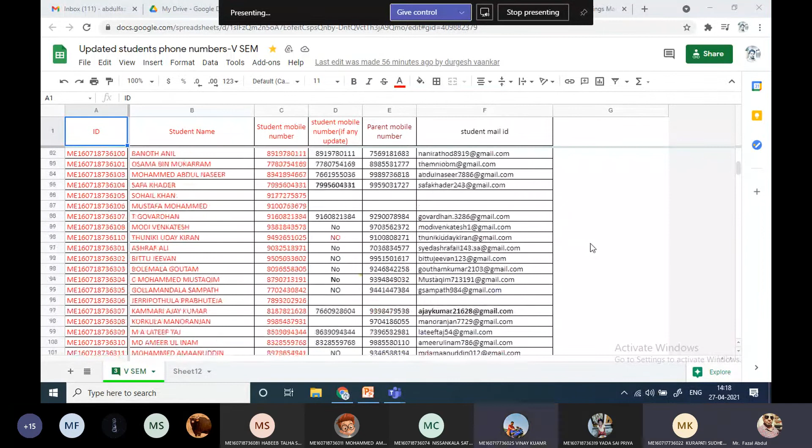Today we are going to discuss the topic of leaf spring design. Before starting, I want to show a video related to the leaf spring, how it is manufactured.

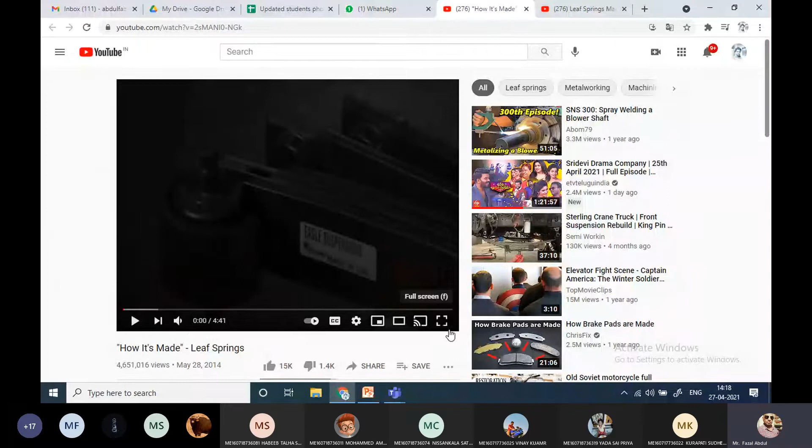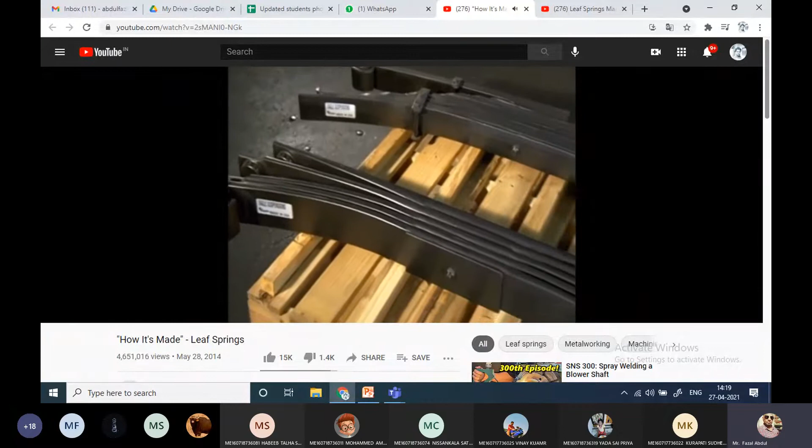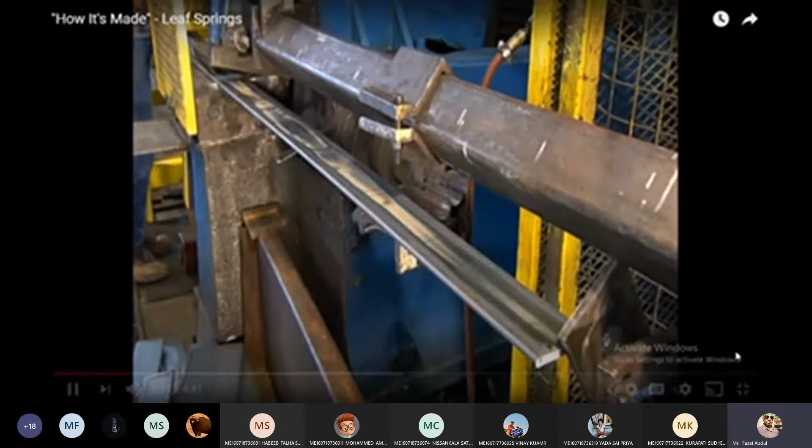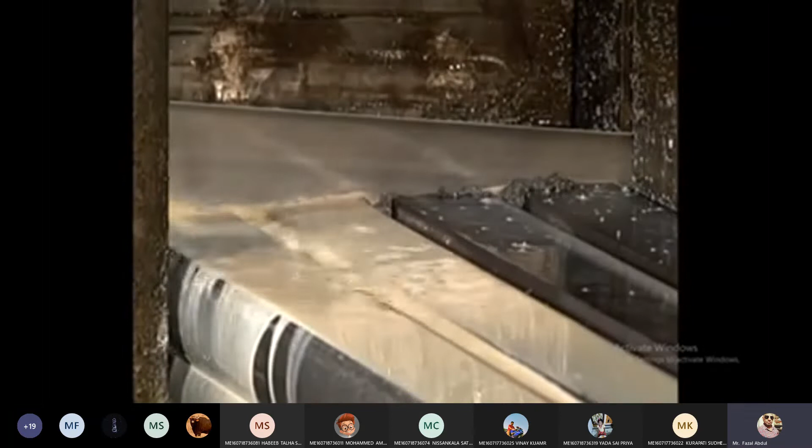A leaf spring is a stack of curved plates or leaves, sometimes just one. This spring has the flex to absorb bumps and dips in the road, but it's strong enough to provide serious support. Today, these suspension springs are generally used for trucks and heavy vehicles more than cars. Production starts with spring steel, an alloy that has elasticity. Big shears cut the steel to various lengths for a multi-leaf spring, one of two kinds of leaf springs. Using a bandsaw, they cut steel for the other kind, known as a full taper spring, made of 1 to 4 leaves of approximately the same length but various thicknesses.

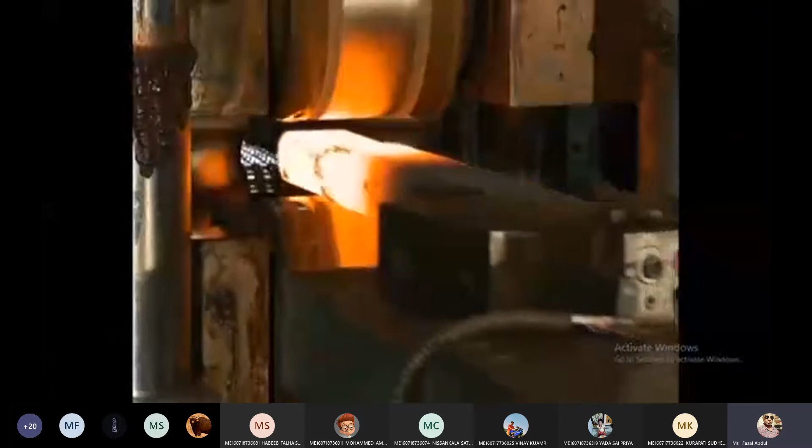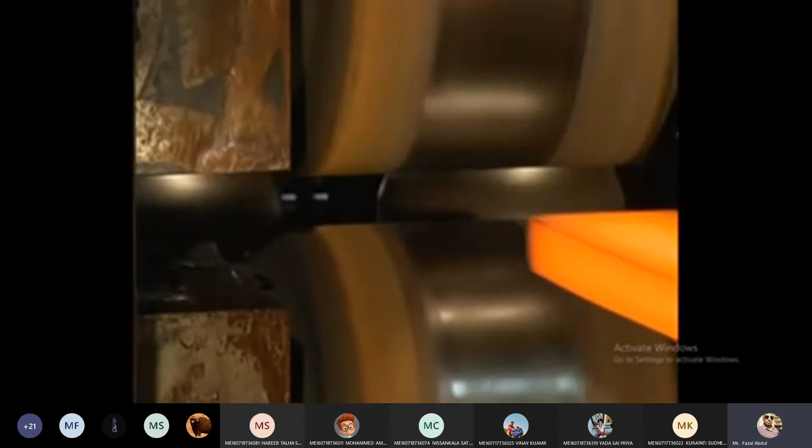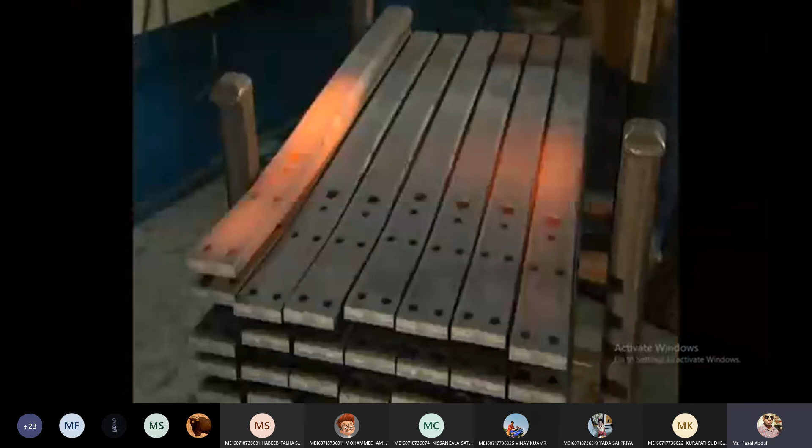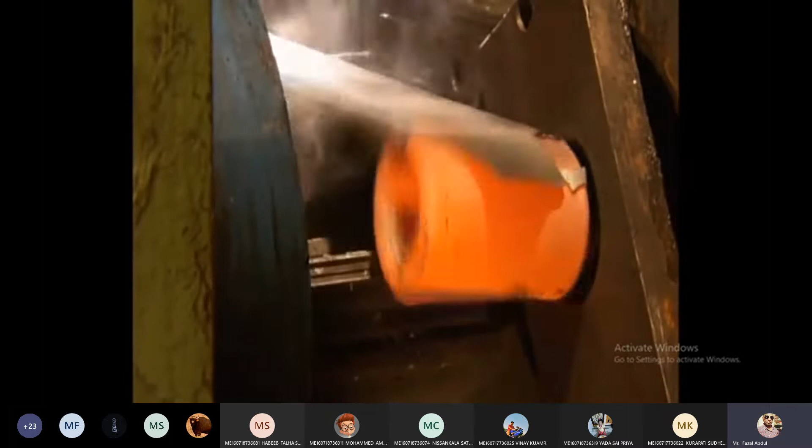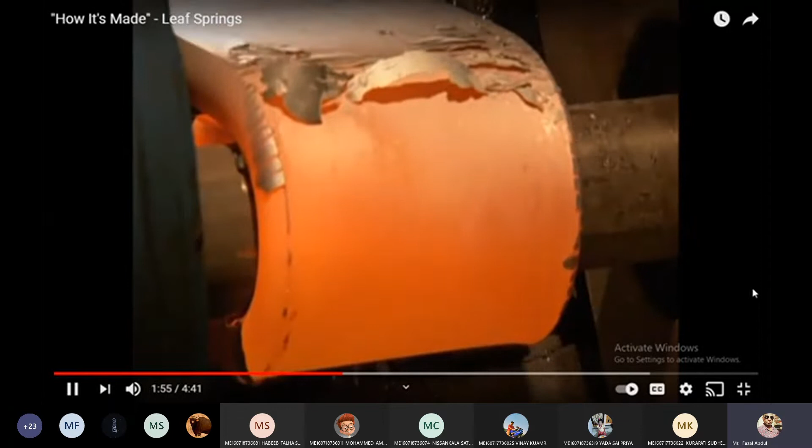Meanwhile, other members of the team work on the multi-leaf spring. They feed the heated tip of the main leaf to a machine that wraps it around a die form, creating an eye mount for attaching the spring to the vehicle. They create an eye mount on the other end as well. Next, they curl the ends of a slightly longer steel bar into a loose C shape, which will serve as an outer protective wrap for the main leaf and protect the eye mounts.

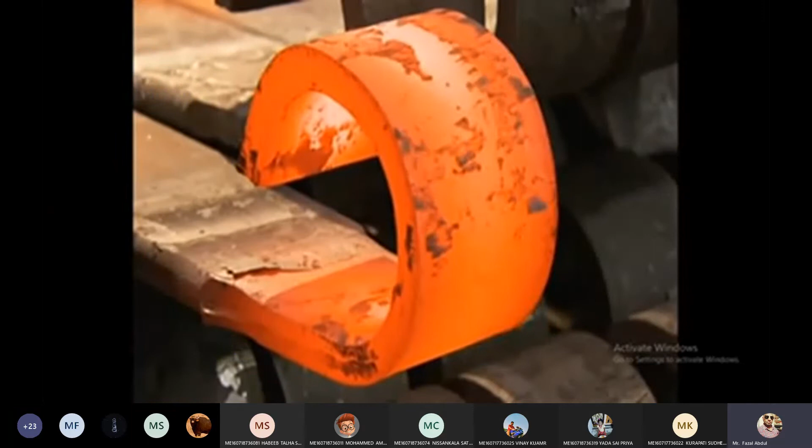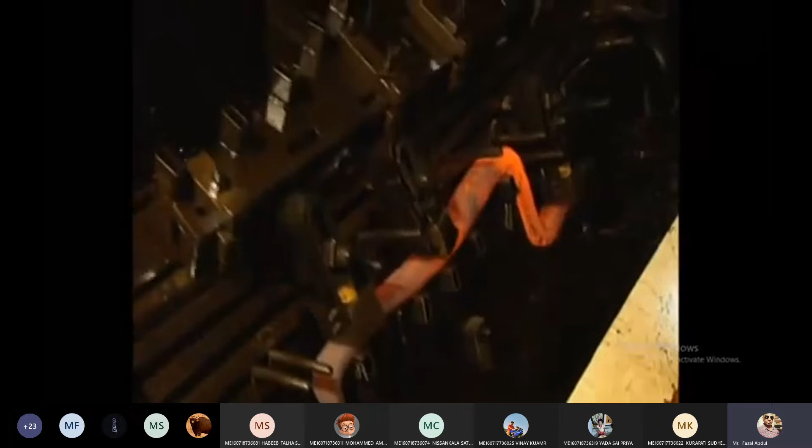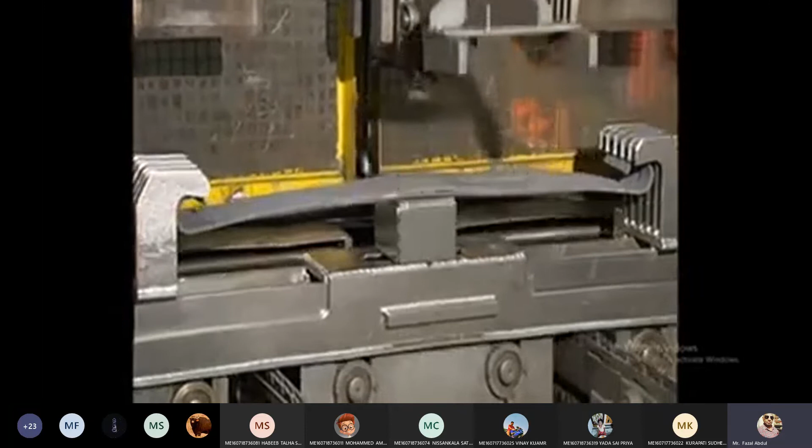Back to the taper spring now. Hydraulic machinery bends it to the final Z shape so it fits around a vehicle axle. They quench both the taper and multi-leaf springs in oil and then temper them in a furnace to strengthen the steel. Then it's time for a process known as peening. Machinery clamps the steel onto a carriage, which takes it through a chamber for blasting, which changes the surface tension, further strengthening the metal.

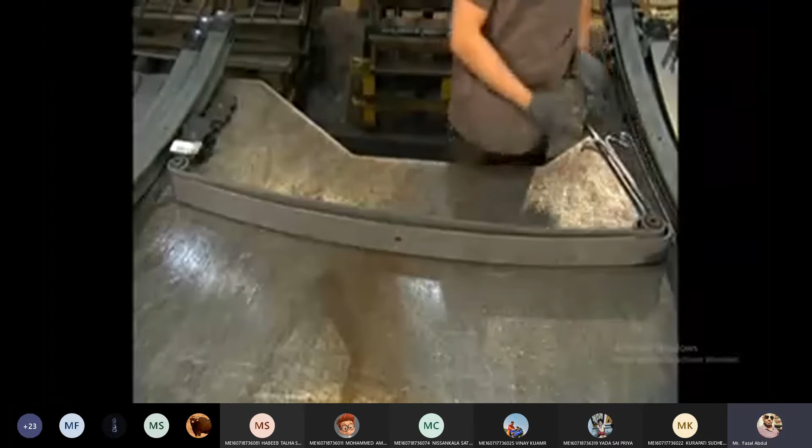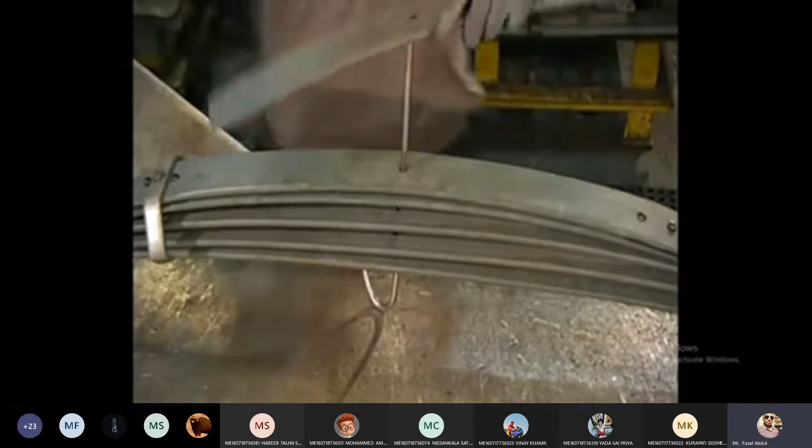A worker now assembles the multi-leaf spring. He inserts a pin through the main leaf and the wrap to align them. Each of the next leaves is shorter than the last; they're known as graduated leaves. This design makes the spring more flexible.

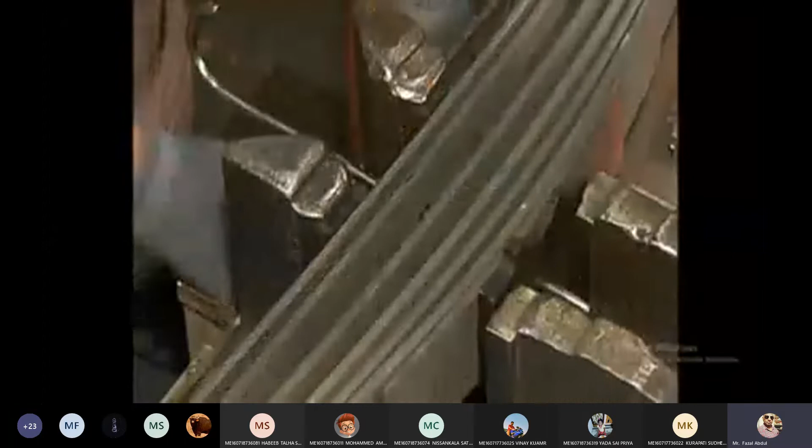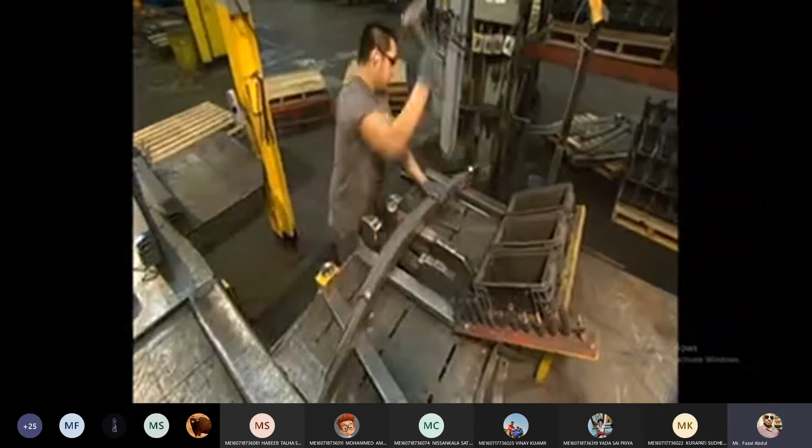He transfers the stack to a hydraulic station and inserts a different pin for more precise alignment. He activates the hydraulic mechanism and it squeezes the leaves together. The mechanism maintains the leaves under tension as he removes the pin and now bolts them together. He pounds clips installed at specific locations on the spring to close them around the leaves. The clips tighten the stack all the way across and stop the leaves from twisting or turning.

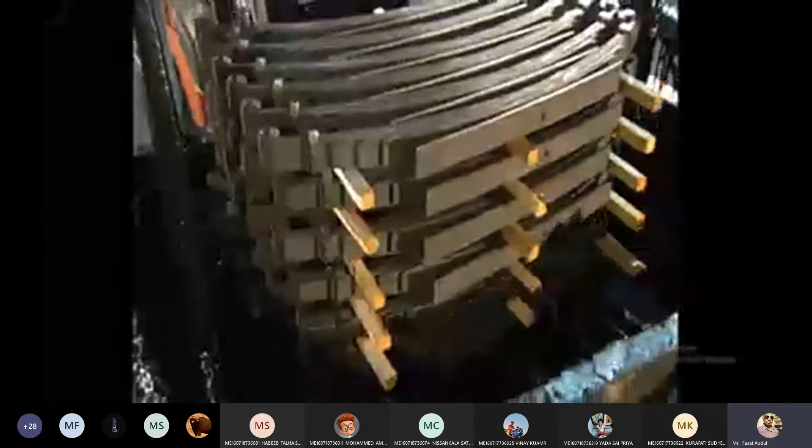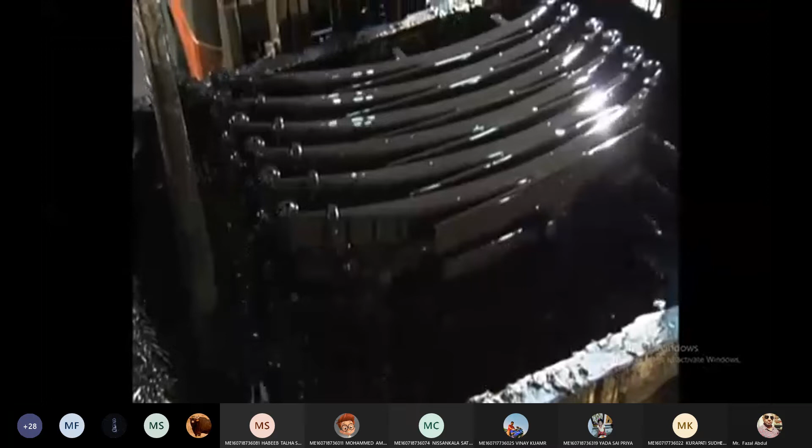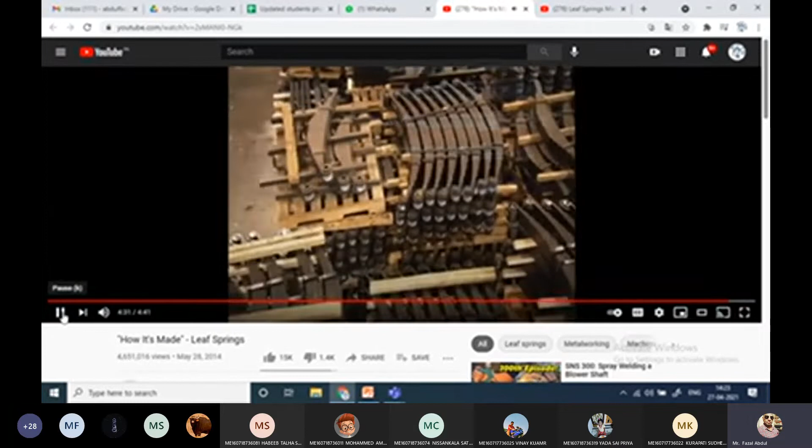Next, another hydraulic device applies pressure to simulate the load the spring will carry. This sets the spring to a specific height and compresses it to stiffen overall performance. The worker measures the spring to confirm it meets specifications. The assembled leaf springs take a quick dip in a tank of black paint, coating the leaves, clips, and fasteners. Painted black, they blend in with other components on the vehicle undercarriage. Now complete, these leaf springs can be depended on for support when the going gets rough.

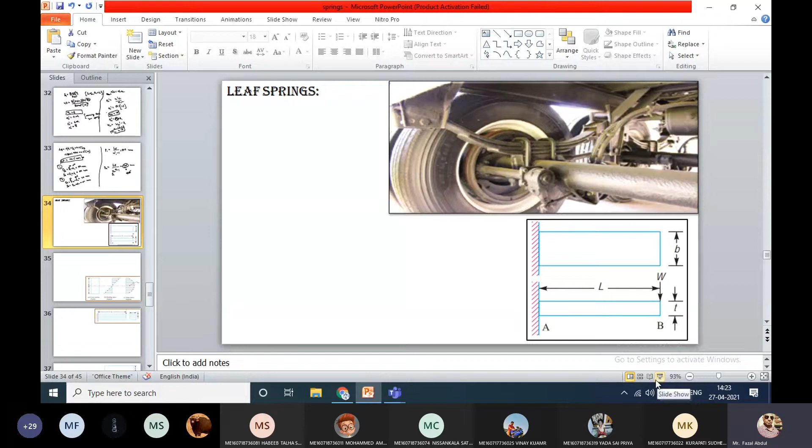So I think you got clarity about how the leaf spring is manufactured. Now coming to the leaf spring design, I'm going to explain how it is designed, on what basis, and what considerations are involved. This I am going to explain today.

We just saw the video of how the leaf spring is manufactured. The structure of the leaf spring is a semi-elliptical shape. To manufacture it, the shape is formed by a number of plates arranged together. Each plate has some width, thickness, and cross-sectional area. All plates are arranged together, and the first portion of the spring is known as the main spring.

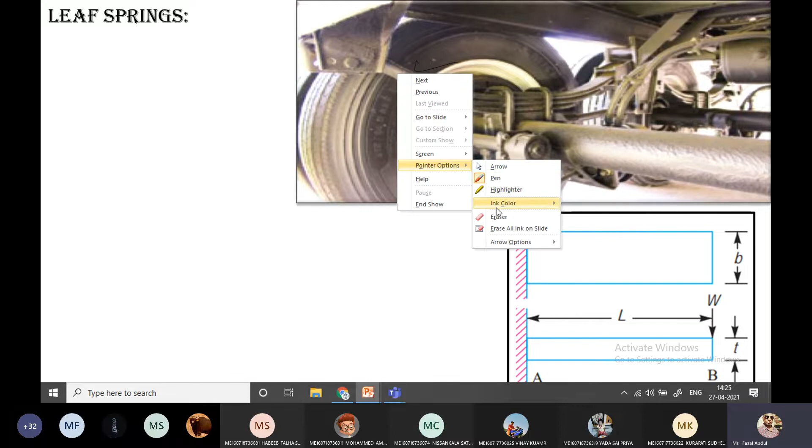In this diagram, the first portion of the spring is known as main spring. The bottom portion of the springs are called graduated or supported leaf. Why do we call it leaf? Because the plates are known as leaves. All the leaves are gathered, and with the main bolt, here the central bolt is there, it is held together.

This spring is known as a flat plate spring. With the flat plate, the spring is going to be manufactured here.

If you focus on the advantage of the leaf spring, it is more advantageous than the helical spring, because the helical spring acts only as an energy absorbing agent. Now this leaf spring, instead of acting only as an energy absorbing agent...

In addition to energy absorbing, this also carries lateral loads, braking torque, and driving torque. In addition to all this, it also acts as a structural member to guide in a definite path. See here, two eyes of the spring, this leaf spring is connected to the chassis here and here. So whenever the deflections come, this will go on to guide the chassis. So that is the advantage of this leaf spring.

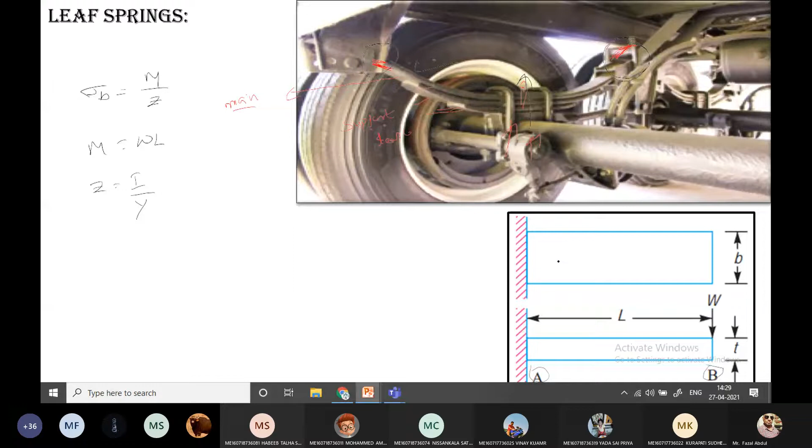Y is the neutral distance from the neutral layer. For this cross section given here, moment of inertia is b t cube by 12, and y is t by 2. Now what is z here? The z value is b t square by 6. Substitute there, bending stress equals w into L by b t square by 6. So this much bending stress is generated in the leaf spring when we consider it as a cantilever beam.

This one we calculated for only one leaf. If you see in the diagram, there are n number of leaves here. So since we don't know exactly how many leaves are here, I am keeping it as n number of leaves.

Now coming to the deflection point of view, you already studied this in the strength of materials subject. For a cantilever beam with point load applying at one end, what is the deflection? The deflection is WL cube by 3EI. Is it right? WL cube by 3EI. Where I is the moment of inertia.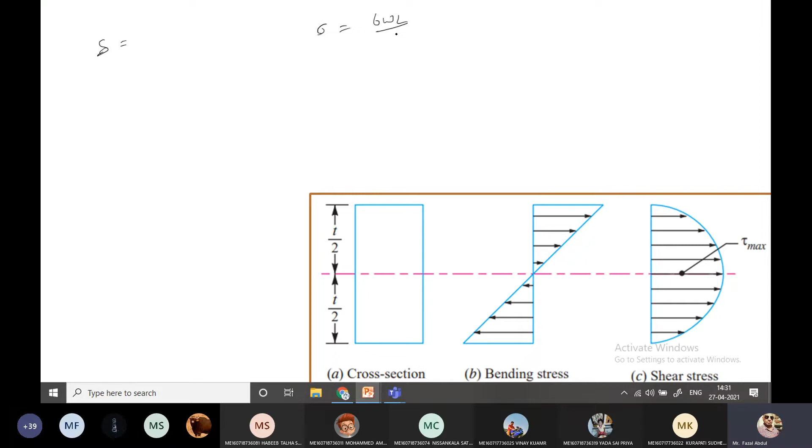If you want the deflection equation in terms of stress, so deflection equals... the load-stress equation, how much we got? Stress is 6WL by BT square. This is the stress equation. From this equation, what is the load here? The load is stress into BT square by 6L.

Substitute here in the deflection equation we just derived: 4 into sigma BT square by 6L into L cube, divided by E B T cube.

So if we simplify this equation, we will get 2 by 3 sigma L square by E into T. So this is the deflection equation.

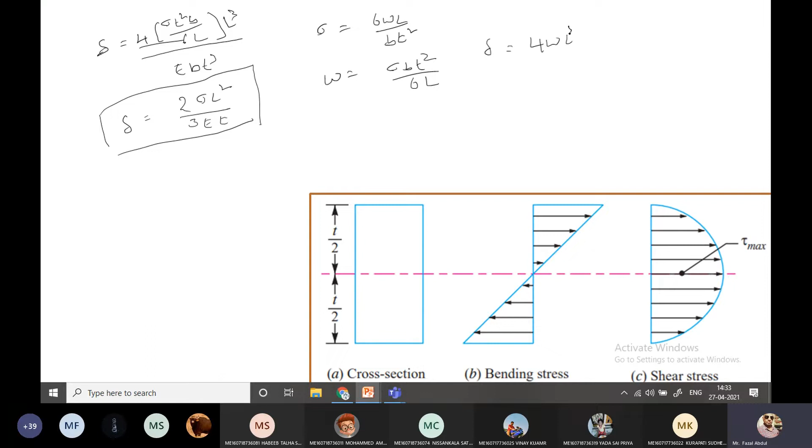Before this equation, what was that deflection equation? Deflection is 4 into W into L cube by E B T cube. So this deflection equation is in terms of load, and this equation is in terms of stress. Give the name for this one, second equation. The previous one is the first, and this is the third equation.

Now see this diagram. This is the cross section of the plate, one leaf. Why do we consider one leaf as a cantilever beam? At the beginning, you have seen that this is the length L, width B, and thickness T. So that we have seen. This is the one cross section.

Now this is the neutral axis of the plate, whatever plate we consider here. So this neutral axis - if you see the bending stress diagram, at the neutral axis stresses are 0, and maximum at the upper fiber and maximum at the lower fiber.

So here we are applying the load. At this situation, this is going to bend and deflect. So the upper fiber is subjected to tensile stress, that is maximum tensile stress. The lower fiber is subjected to maximum compressive stress.

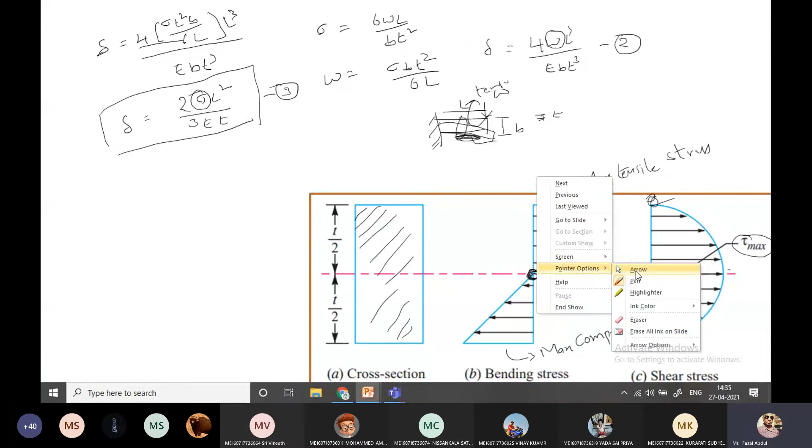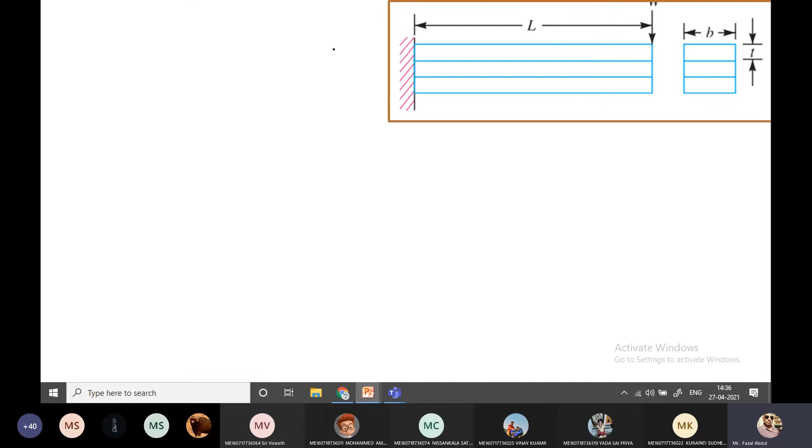Now deflection and stress we have to calculate with the consideration of simply supported beam. So see here, this is the one diagram I have pasted here. For the cantilever beam, if n number of spring plates are there, how does it look like? For that reason the equation changes slightly with n. Now, applying the same concept to the simply supported beam.

So at this time, what is the deflection? What is the bending stress? Bending stress we will get from the same equation, because bending moment, due to application of load, if we consider one side, M by Z is the bending moment, W into L. Section modulus is B into T square by 6. So that gives 6 into W into L by B T square.

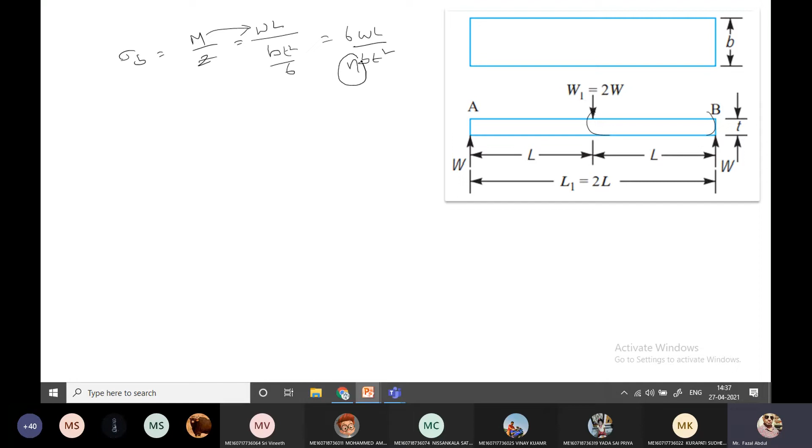Now this is for the single plate. For the leaf spring there are n number of plates. For that reason the equation slightly changes with n. If we keep n here for the n number of leaves, this is the bending stress calculation.

Now for deflection, see here, this is a simply supported beam. At point A and point B, two supports are there, and here the load applied is twice the initial load, with length 2L. So from A to the middle point, L distance is there, and from the right to the middle point, L distance is there.

Now at this time, what is the deflection for a simply supported beam? That is WL cube by 48 EI. This you already studied in the strength of materials subject. So here I am writing W1 L1, because this load has this much intensity and length has this much length, so 2W into 2 into L cube by 48 EI.

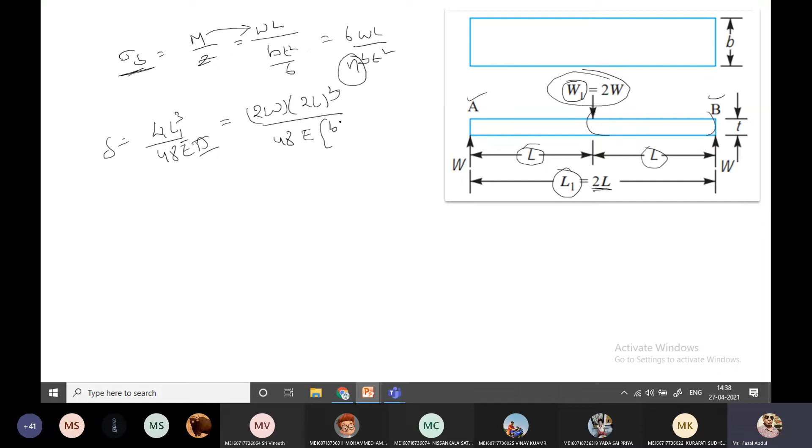Sorry, this is I, EI. Again, what is I here? I is nothing but B T cube by 12. So if we simplify this equation, what will we get? WL cube by 3 EI - sorry, EI means B T cube by 12. So simplify this one.

4WL cube by E B T cube. So this is the deflection for the simply supported beam.

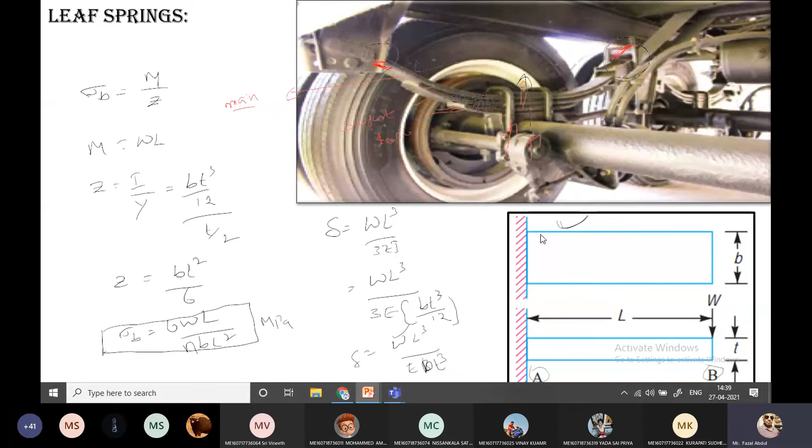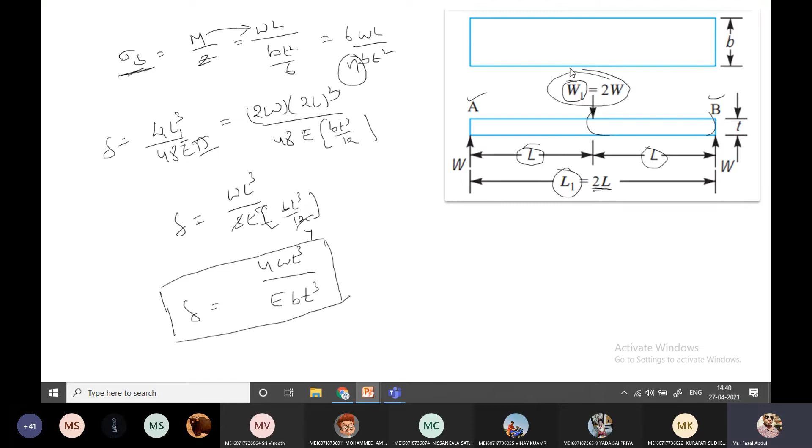Okay, now see here. This is the spring having uniform length, meaning there is no reduction in the material. If material is reduced, this is one type of reduction in the material for the spring.

So here this is the first main spring, and these are all the supported springs. The main spring is used to connect the chassis, and the supported springs are to support this main spring, meaning whatever energy is generated and whatever supports are there, everything is going to be placed on the main spring, and these are all the support to these springs.

So if we maintain the same uniform length for these springs, material is increased, weight also increases, and power to weight ratio decreases. To avoid this disadvantage, some material is removed and the leaves are made in a triangular manner. That is the reason the supported leaves are also known as graduated leaves, meaning material is removed gradually here, here, and here, making it into a sharp triangular manner. That's the reason this is referred to as graduated springs.

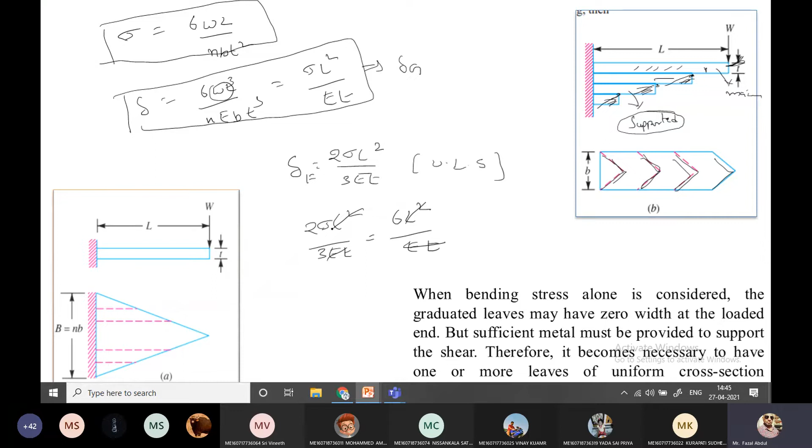Okay, so now full length into 2 by 3 equals graduated, meaning full length equals 3 by 2 graduated length. So from this statement, what we can conclude is the stress in the full length spring is 50% more than the graduated length. So with this we can define another parameter.

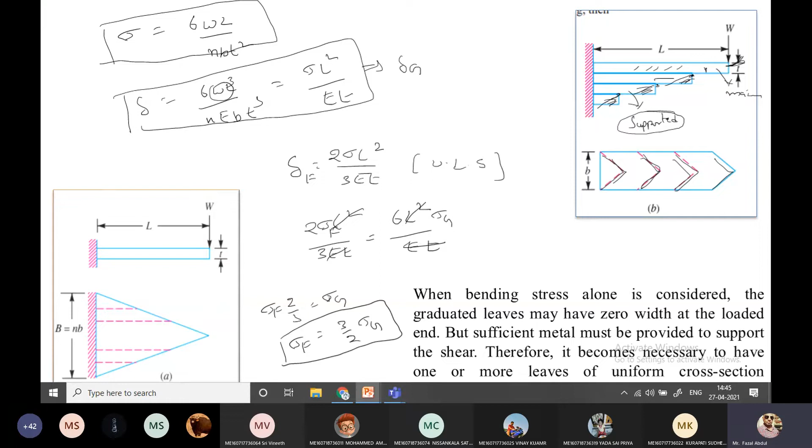So with this we can define another parameter. What we wrote, full length stress is 3 by 2 times the graduated. So what is the full length? The full length stress is 6Wf into L by N into Bt square equal 3 by 2. What is the graduated? 6Wg into L by Ng, this is the Nf full, into B into T square.

So with this, if we simplify this equation, L gets cancelled, T square B gets cancelled. So if we simplify, what we'll get? Wf for the full length load and Nf, number of springs on full length, equal 3 by 2 into load on graduated leaf by number of graduated leaves. This is in terms of ends, and in terms of load also we can write Wf by Wg equal 3 by 2 into Nf by Ng.

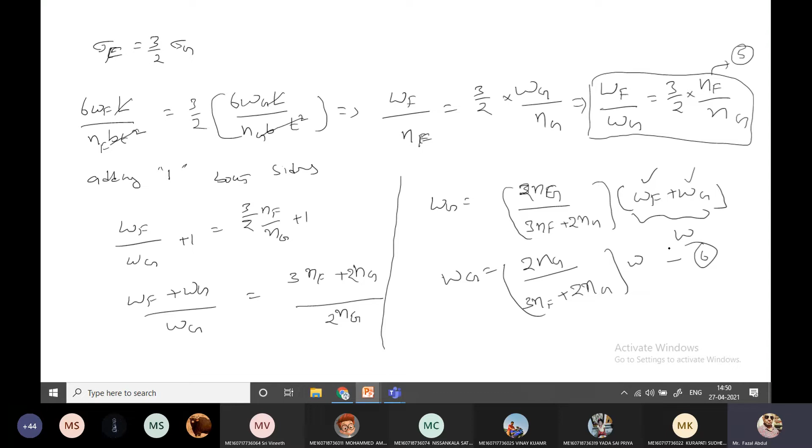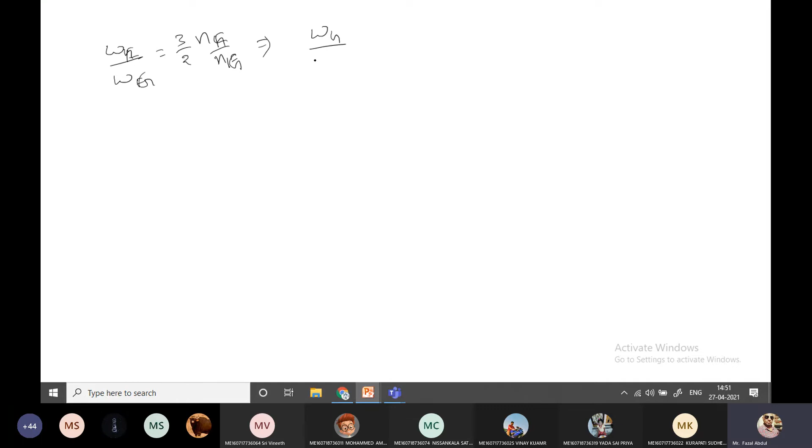Now, previous fifth equation was, what is the fifth equation? WG by WF equal 3 by 2 NG by NF. This was the previous equation. Sorry, WF by WG equal 3 by 2 NF by NG. This was the equation. This equation also we can write in this form: making reciprocal, WG by WF equal 2 by 3 NG by NF.

Same here also, adding one both sides. So we'll get WG plus WF by WF equal 2NG plus 3NF by 3NF. Okay, so with this, what we'll calculate, WF we can calculate. So WF equal 3 into NF by 2NG plus 3NF, into WG plus WF.

This whole is considered as a load. The leaf spring is loaded, that load is distributed: somewhat load is taken by the full length leaf, some load is taken by the graduated leaves. Okay, now this equation changes as: full loaded spring WF equal 3NF by 2NG plus 3NF into W. Now we calculated WF, WG.

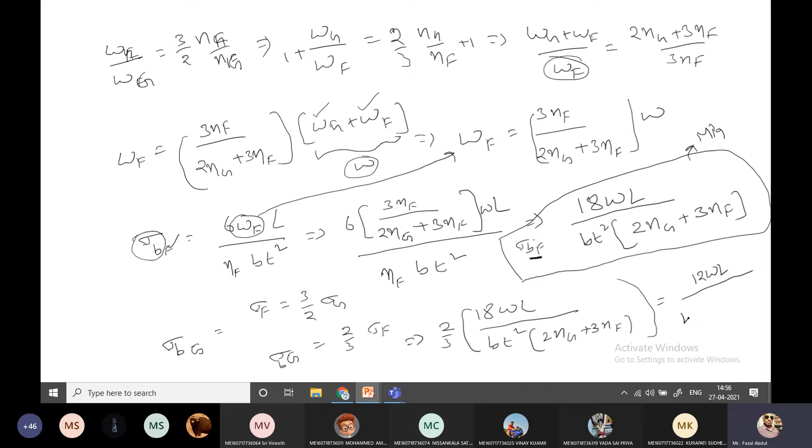Now simplify this one, what you will get? 12WL... here I am writing 12WL, 12WL BT square into 2NG plus 3NF, that is nothing but bending stress for the graduated leaves in terms of megapascal. Okay, so this one also you have to remember.

After calculating the bending stress for the full length leaves and bending stress for the graduated leaves, one more parameter is there, that is deflection. So we are comparing here what we did previously. First we calculated this, what we calculated initially when we considered one of the leaves as a cantilever beam.

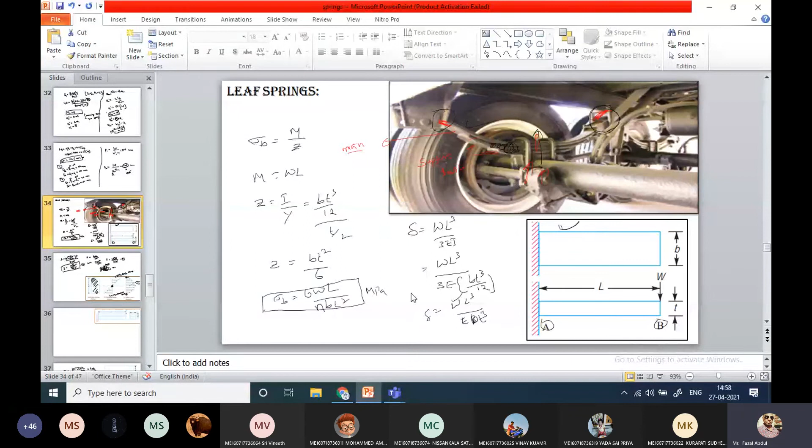For that, what is the bending stress, what is the deflection, we calculated. Now another one is the simply supported beam. For that we calculated bending stress and deflection. Both beams whatever we considered, cantilever and simply supported, both are in the form of full length leaf.

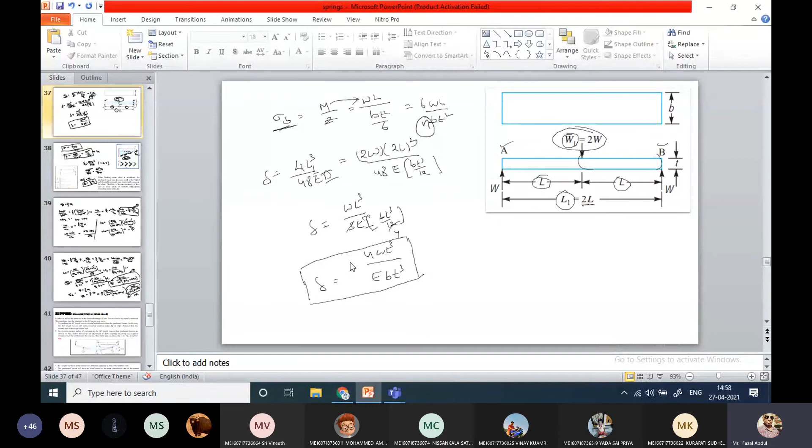So for both cantilever and simply supported, what happens if we reduce the material here? That is nothing but removing material to reduce the space occupied. Some bending stress here also, after removing the material and applying the load, bending stress and deflection is going to generate. So what is the comparison there?

For the full length and for the material reduced - full length means the first one is as usual full length, and we are removing the material for the supported leaves. So at that time, bending stress we are calculating separately for the full length leaf and for the graduated leaves.

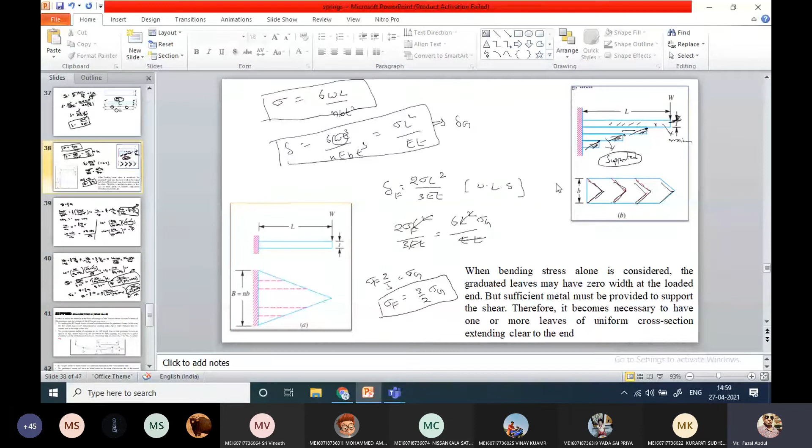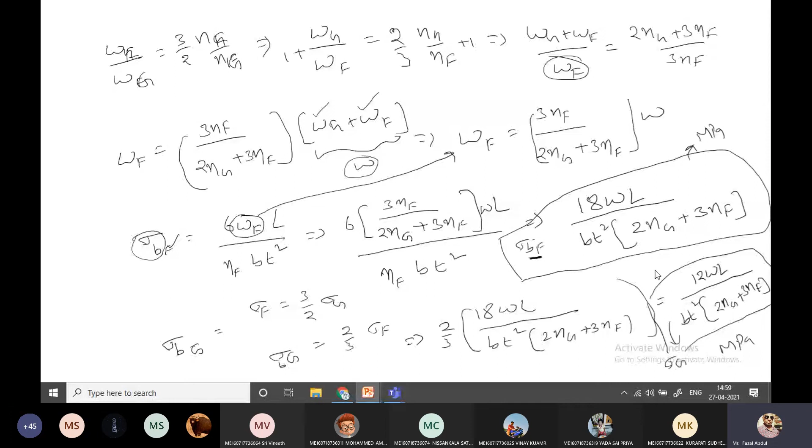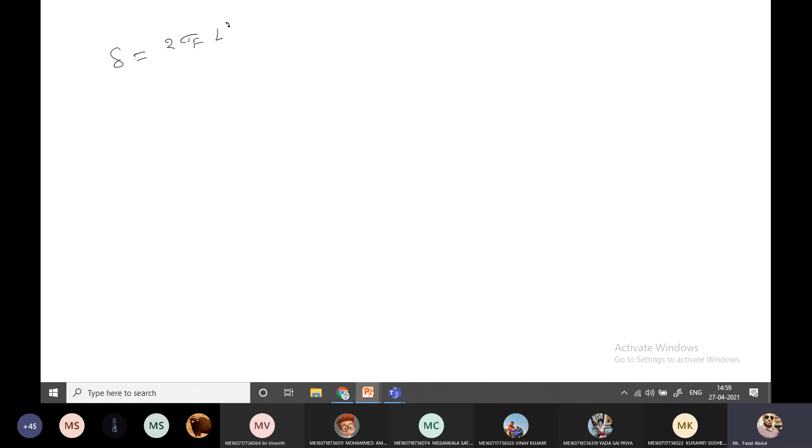Now deflection. So what is the deflection for both springs? Both are deflected in the same manner. So what is that equation we have to calculate now? Deflection for this is 2 into stress for full length leaf into L square by 3E into T.

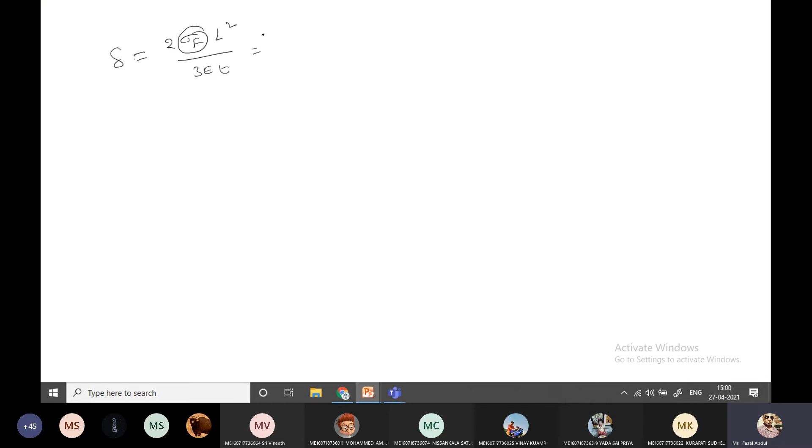So what is sigma F? Sigma F, just now we calculated. So what is the sigma F? Substitute here. Delta is 2 into L square by 3ET into sigma F, which is 18WL by BT square.

Into 2NG plus 3NF. Simplify this one, so we will get 12 WL cube by EBT cube into 2NG plus 3NF.

So this is the deflection when we combine the graduated leaves and full length leaves. Graduated leaves are also called supported leaves, but we are removing some material. So this is the deflection when we combine both springs.

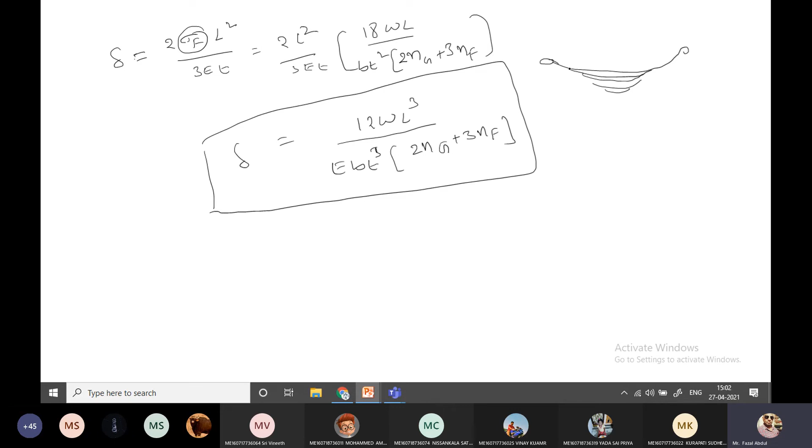So here the load is applied, and the load is going to be distributed here. This is the main bolt. So for this one we calculated the full length bending stress, how much. For this, a number of graduated leaves are there, for which we calculated bending stress, and all are deflected at the same time.

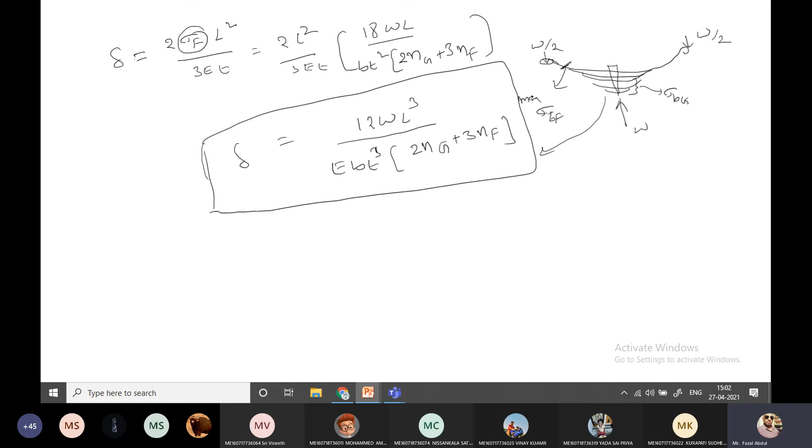So that's the main function of the full length leaf spring. For that full length spring, we consider the deflection we calculated for the spring. This is in terms of mm. Now another topic is nipping.

Nipping is nothing but making the stresses in the spring all equal. So here all are equal. Why am I telling you this? Because in the previous case we have seen that bending stress in the full length leaf is more than 50% of the graduated spring.

By seeing this statement, what we can conclude is that the stresses are not uniform in the leaves. So if we make the stresses in the full length and graduated leaves equal, that is nothing but nipping - equalizing the stresses in the spring leaf. We do this to utilize the material to best advantage, and to meet that we have two methods.

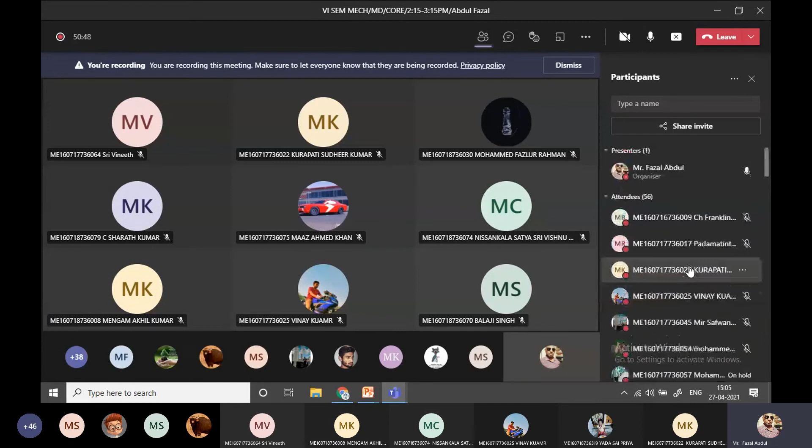So here, by maintaining the smaller thickness than the graduated leaf, the distance between the neutral axis to the outermost layer is very less. That's the reason bending stress is reduced compared to the graduated leaves.

By giving the greater radius of curvature to the full length leaf than the graduated leaf, before assembling, after giving the radius of curvature to both, and after making the assembly with the main bolt, the full length leaf is going to move in the backward direction.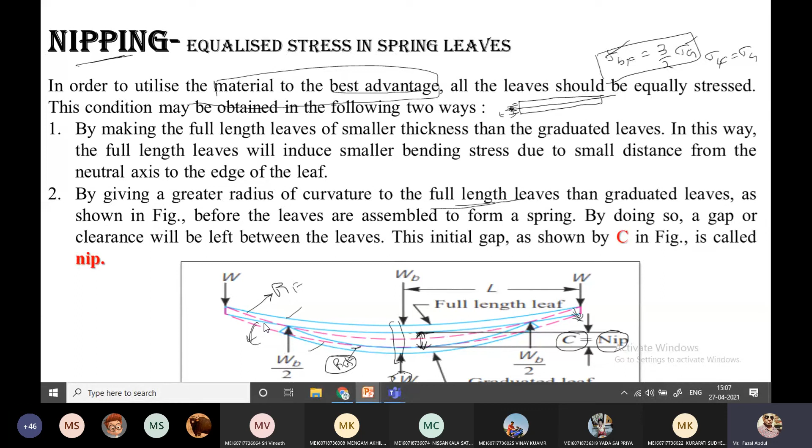Now for the graduated leaves, the initial stresses are in the same direction as the normal load applied. So see the difference here: for the full length leaf, the initial stress acts opposite to the normal load, while for the graduated leaves, the initial stress is in the same direction as the normal load application.

Now when we apply the load gradually, the full length spring first gets released from the initial stresses. After releasing the stresses, because we continue gradually increasing the load, the main leaf again gets subjected to stresses, also in the opposite direction to the load application.

Now the full length leaf is subjected to stress less than the graduated leaf. The initial gap gets adjusted here. There is some gap because of the continuous application of load, so the stress is released, and whatever gap is there between the springs gets covered. That is adjusted due to gradual load application.

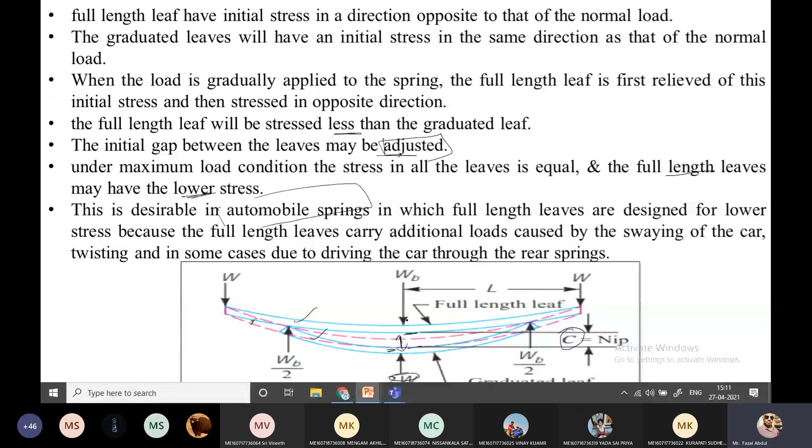So this is the theory, and tomorrow we will find what is the C value and what is the stress. Nothing but we are equalizing the stress here. After equalizing the stress, we will find what the stress value is. Based on this topic, we will practice one or two problems. With this, the first unit is going to be completed.

So regarding today's topic, do you have any doubt, Babu?